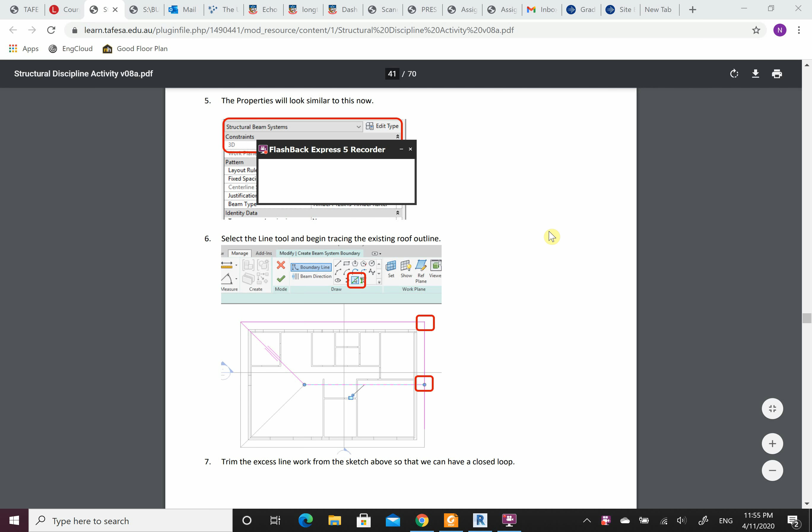Today we're going to go through putting in our rafters and doing our rafter schedules, as well as some callouts and details. I want to bring your attention to the step-by-step instructions again. Please make sure if you're not following along that you are going through these. They are very important and very useful. You will need to do it for your practical 3 as well as your project.

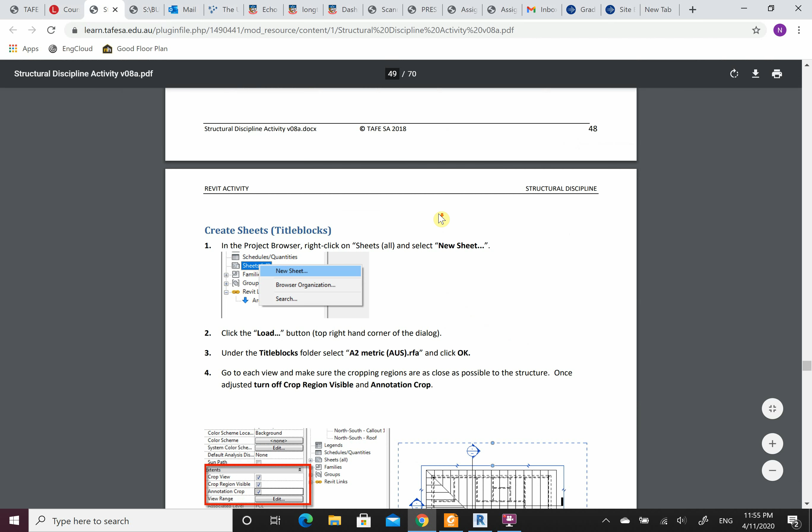The other thing I need you to look at is what is expected for you to submit, which is these two sheets here. So this is what we're going to be getting to. I'm not going to be going through the step-by-step instructions in full, I'll probably skip over a fair bit of this and talk through it as I go. Please make sure you do visit it.

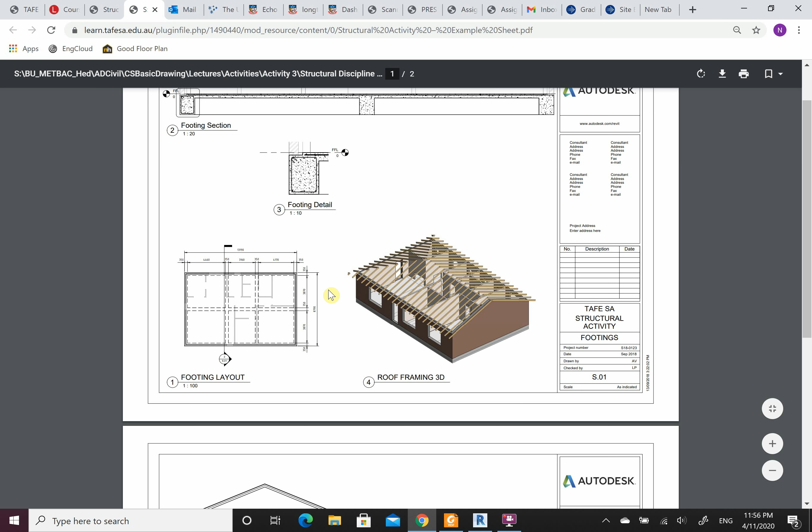These aren't completely perfect. As I mentioned last week, all of the footing cross-sections that you're showing, you have to show reinforcement in all of the footing beams. This solid line here is due to a horizontal beam sitting in front, so that should be hidden as well, same within the footing detail. For our footing layout, from the measurements, these gap to witness lines, these drag lines here, you would hide from the drawing. I showed you on Thursday how to hide them.

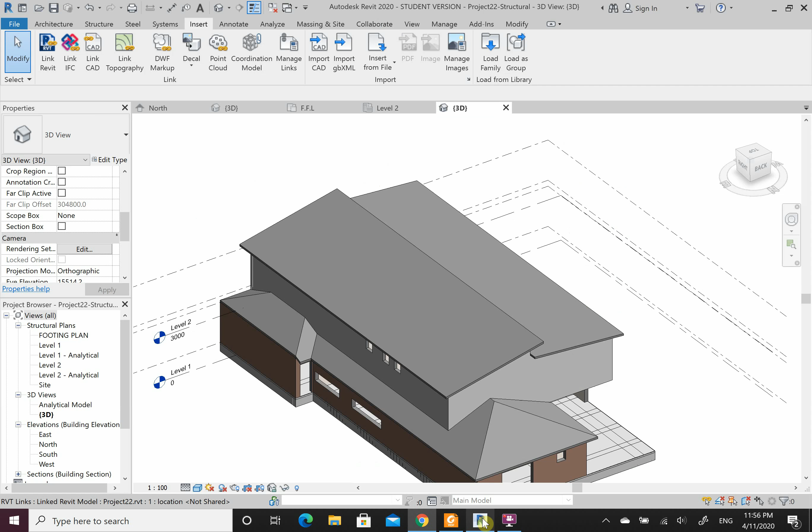So what we're going to be producing is these - this is what we're seeking for our practical 3. I'll be cutting between two drawings, the 2-story as well as a single story. I need to model a single story roof to show you guys and help you for your practical 3. Most of you have a hipped roof like this, whereas for the 2-story we have a skillion up top.

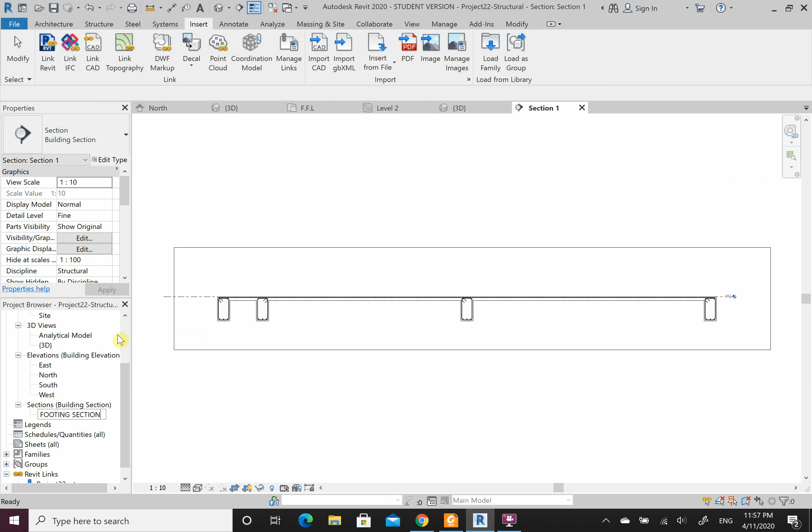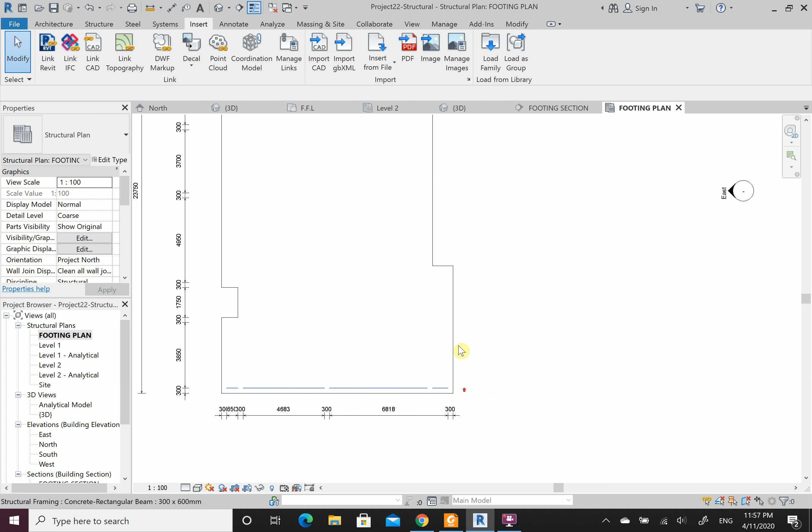Before we go into this, I want to come to my footing section, so I'm just going to rename this one here to footing section. Also want to highlight that usually you wouldn't take something this big - you would find one in your footing plan, and you'd probably take these 3 here. They're much closer together and there's only 3, that's all you need to show: external, internal, external. You don't need to show 100 of them as we come through. So this section probably should have been taken through here, but that's okay.

Now, footing cross section, scale of 1 to 20. Our footing detail, scale of 1 to 10. So how do we create this detail? What we do is we go to View, and we do a thing called a callout.

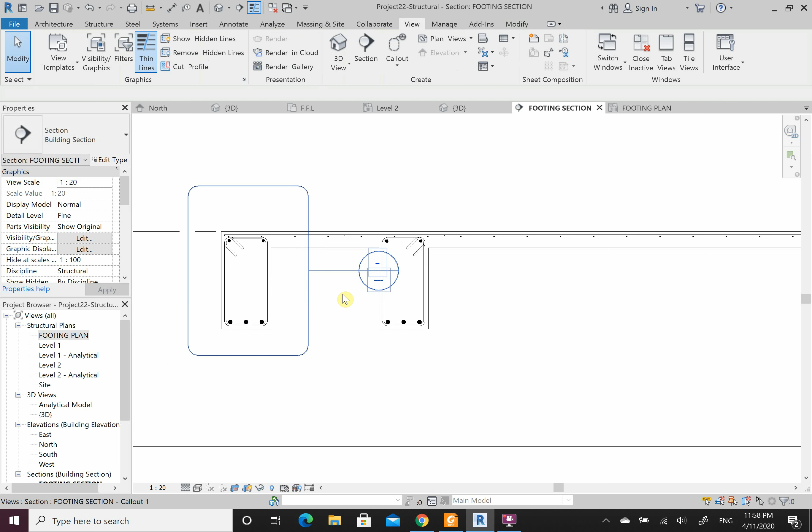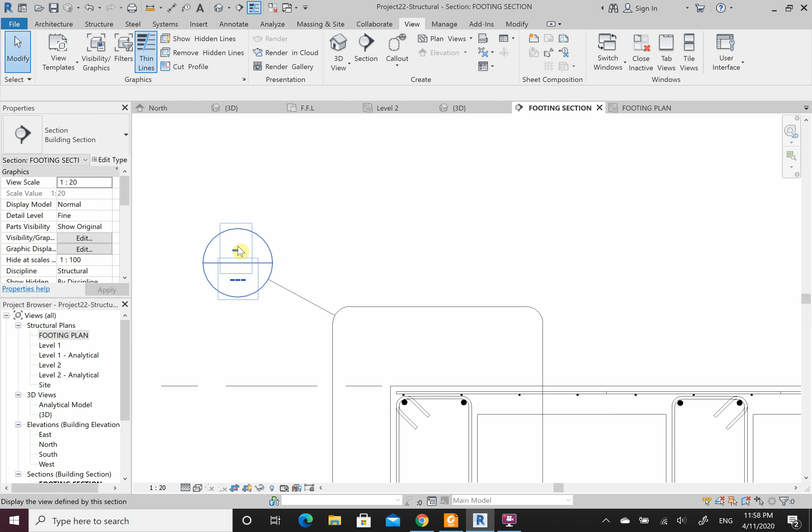Click on the callout, click once, click again, and what's in that bubble is going to create a new view. Spin this around to the outside - I'll come back to what this is here in a minute. But what you'll see is when you put it onto your sheets, this up the top will turn into a number, 1, 2, 3, 4, 5, 6, and that is the drawing number. So if you drag this detail onto the sheet, if it's the 4th drawing on there, this will come up with the number 4.

The bottom here relates to the sheet number that it's on, so if it's on sheet 1, this will come up with S1, if it's sheet 2, it will be S2. Please just be aware of that, but you'll go through more of that in your structural drafting course. So the callout - right click, go to view. This is what it is, so this here, we detail at 1 to 20, 1 to 10.

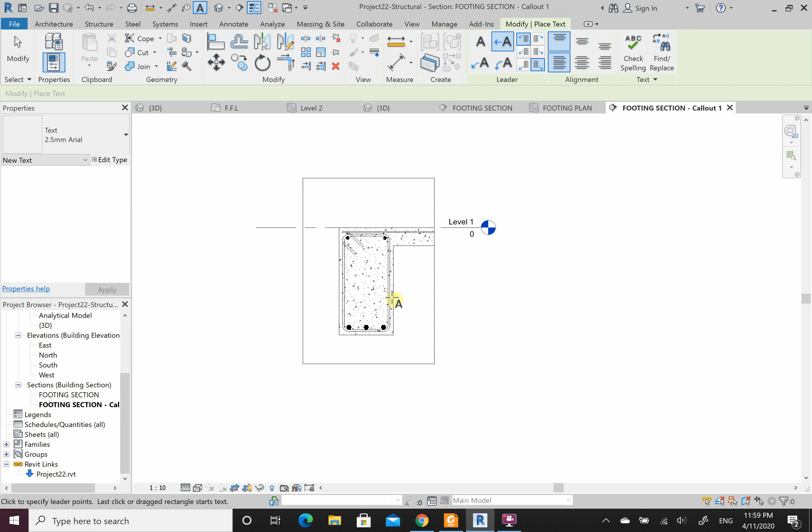And this is where we would annotate. So to annotate on it, we would go Annotate, Text, click with an arrow here, and I might go for the ligatures first, so let's go to here. And these were W10 at 300 centers, W10 ligatures. I can see I can't see it.

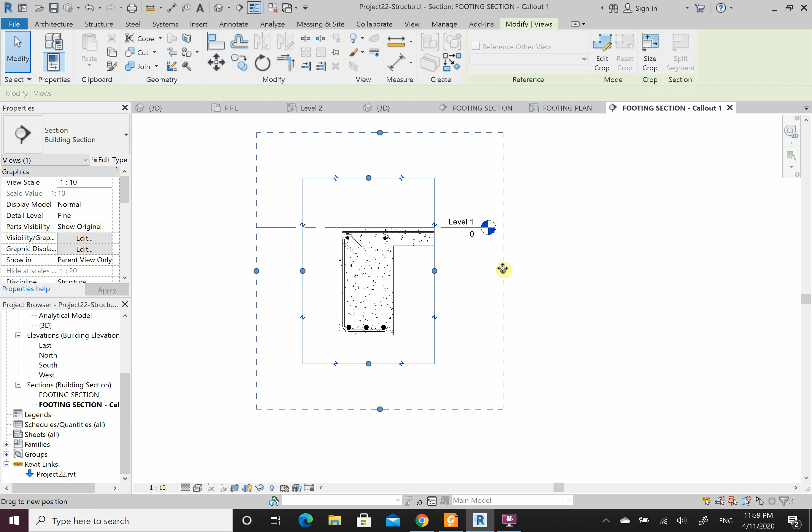Now what is that? Well, if I click on here, remember the solid line is for the model and the dashed line is for the annotations. So if I drag this out, that's all that's happening here, is it's cutting out the annotations. So untick the middle one, making sure the other 2 are ticked. This gets rid of the box, and I might just put in a bit more text while we're here.

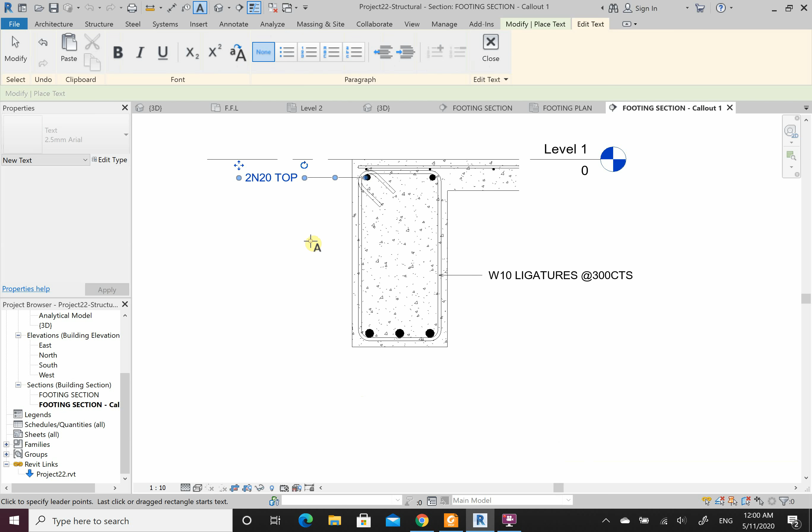You will do a lot more of this in your structural drafting, but we'll just go through it here as well: 2 to 3N28, all in capitals, bottom. And I have 2N20, top.

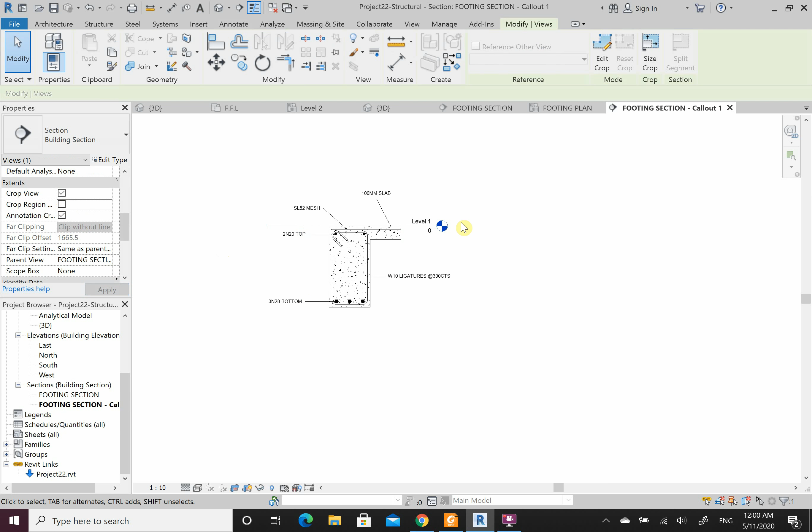From here we could also, if we wanted to, come through SL82 mesh. Might have a slab, whatever details it is that we need. So bring this back on, drag it out so I get that last one. And cool, that is a little detail here.

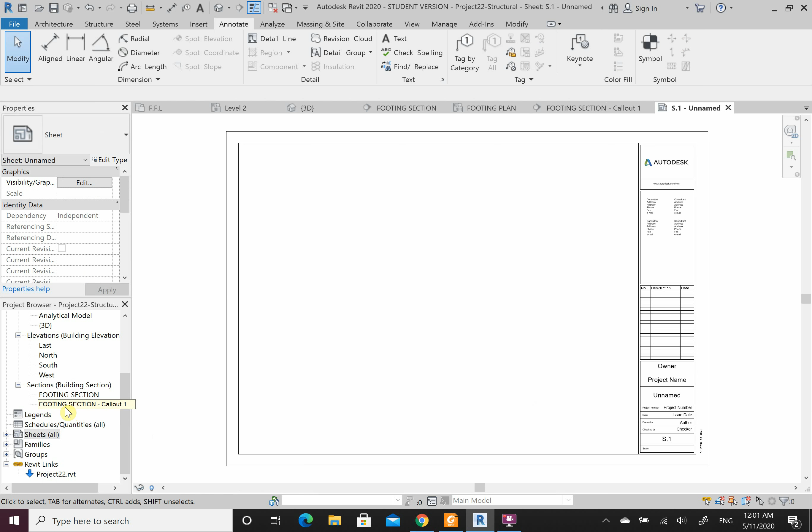We've put some annotations on here. Shortcut is TX on the keyboard, which allows you to write text as well. You'll do a lot more of this in structural drafting, but this will get brought onto your sheet as well. Just to reiterate, when we do sheets, usually it's an A3 sheet. To bring it on, we just click and we drag it across.

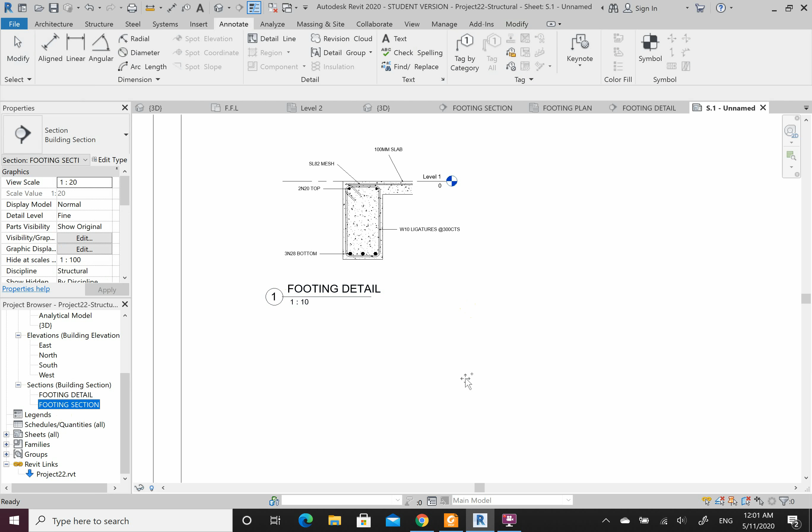So we'll alter this, rename. Here's a footing detail. Alright, so the detail will tuck in nicely, we'll just fix this up. If I bring in the footing section I've drawn before - this one hasn't been tidied up - but what you can see is now I have one S1. So 1 is drawing number 1, S1 is sheet number 1. Alright, so that's where that comes from.

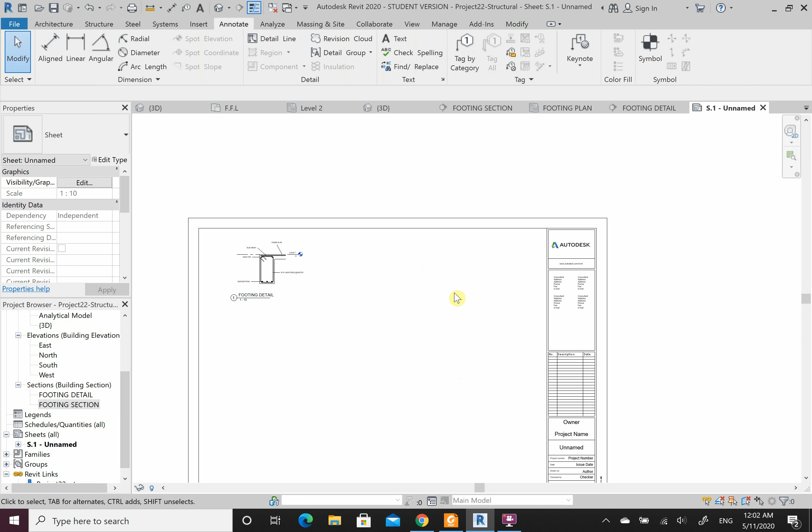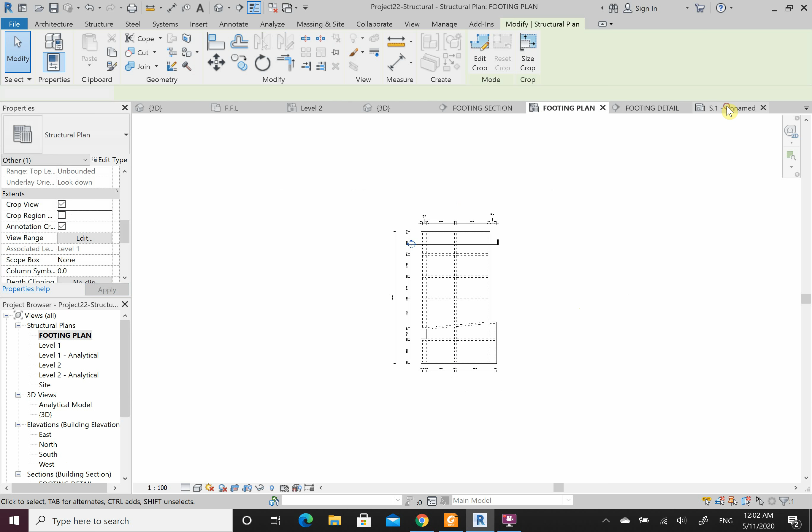So this detail will need to come on. You'll need to do your other section, your roof framing layout and your footing layout. So for the footing plan, making sure to bring it onto the sheet, we tidy it all up. Come back to my sheet and my footing plan will come on somewhere. Alright, let's fix this line up, select it, come across.

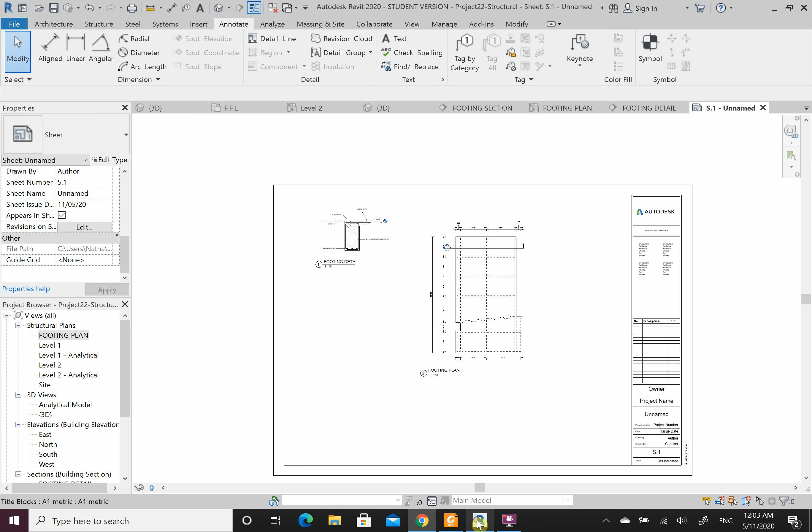What we're going to do is we're going to do one of these, but we're going to put in our rafters first. So you have done your rafters in construction practice. Now we're going to model it onto the computer. So how do we do it?

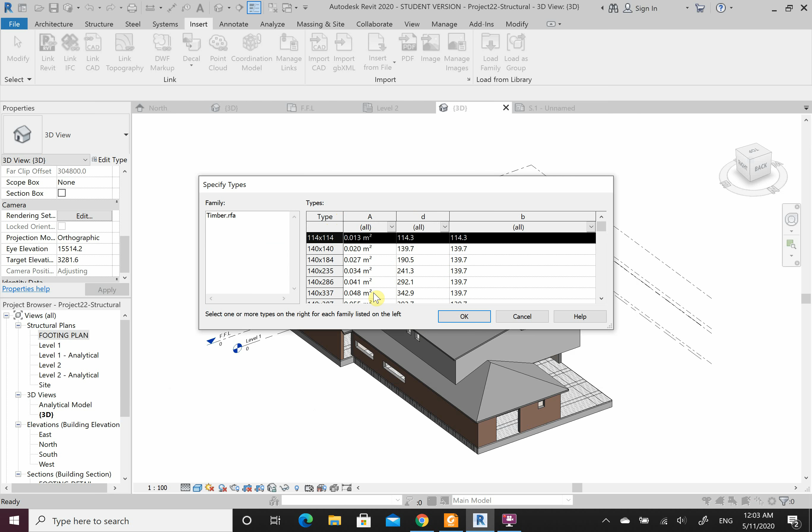Well, our rafters, we have to load in a new family. What we're bringing in is a structural framing, wood, timber. What we want is a 140 by 45 MGP10. So let's grab this one here. Let's go back. Oh sorry, structure beam gets me my timber beam. Edit type, duplicate, 140 by 45 MGP10.

Standard rafter, 140mm deep, 45mm wide. MGP, machine graded pine, 10 is the structural grade. So 10 refers to the stiffness, which is 10,000 MPa or 10 GPa. For steel we've got 200,000. For concrete, between 32,000 to 38,000 MPa, depending on the grade. You'll learn more about that in structural analysis and in your mechanics. So all you need to know is MGP is machine graded pine and 10 is the structural rating.

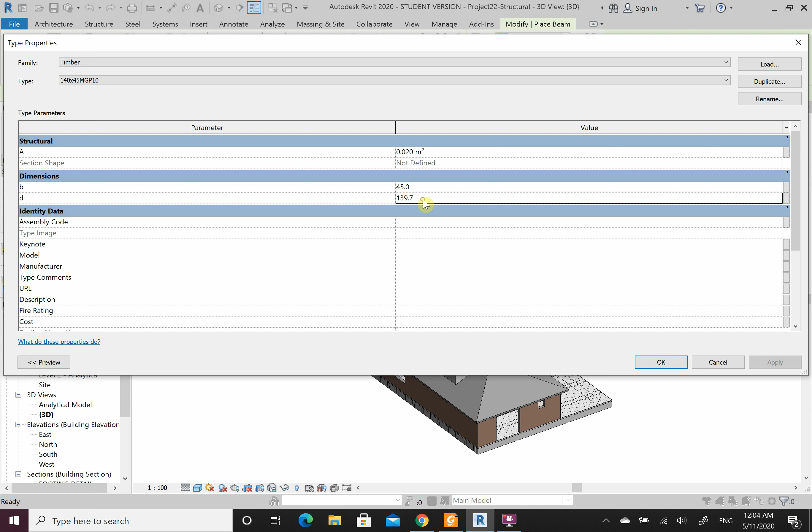Edit it in here, so my width is 45, my depth here is 140. Apply. Now what we're going to do is we're going to go structure, we're going to do a beam system. So what this does is this creates an array, like we did on CAD - it creates an array of just spaced beams the whole way along the roof.

So in the properties I have a few layout rules. My fixed distance, let's change this one here. Well actually, let's start with the layout rule. I've got a few different things here: fixed distance, fixed number, maximum spacing, and clear spacing - for different things you'll use different ones. We never really specify a fixed number. Usually it's a fixed distance or max spacing or a clear spacing. Clear spacing, not so much, so usually it's going to be a fixed distance or a maximum spacing. These are the center distances.

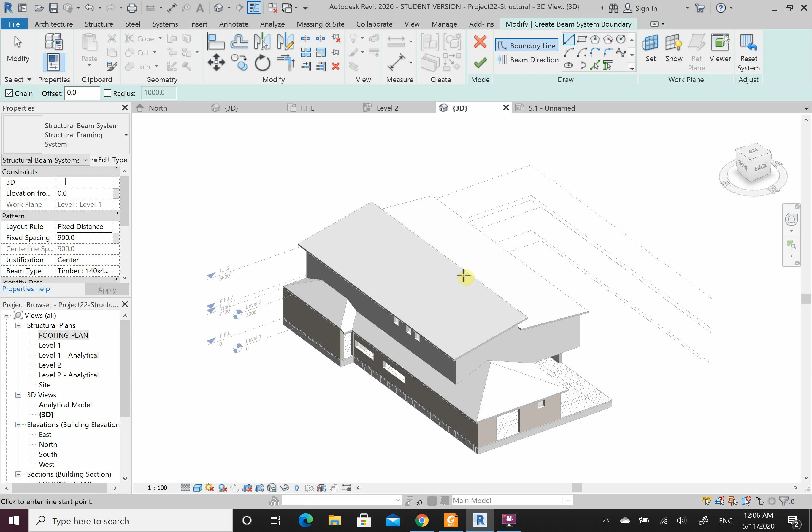So let's take a fixed spacing of 900. Alright, so each rafter will have one, then we'll have a 900 gap, 900 to the centers. And the purpose of rafters is to fix our roof sheets to, so 900 is a good spacing. If we space these out too far, the pressure of the wind hitting the roof sheets, if they're not fixed at close enough intervals, the wind can rip the roof sheets off. You'll learn more about that in your structural analysis. But for now, let's take 900 for our rafters, and our trusses might go to 1200.

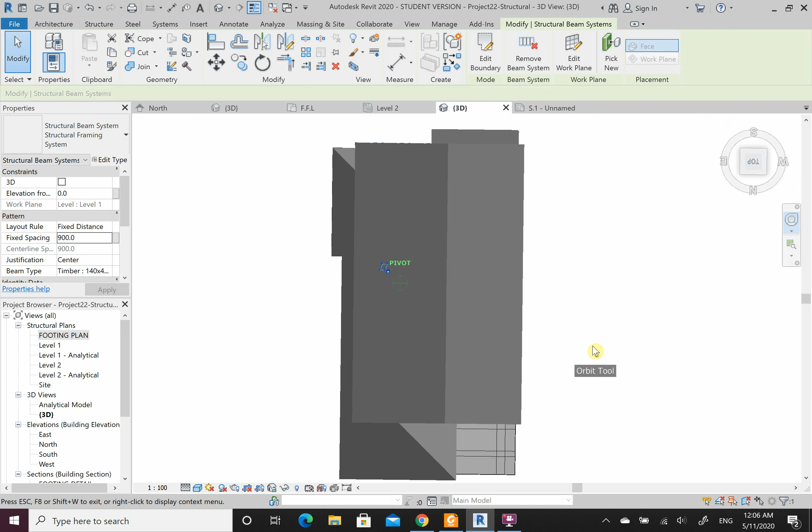So let's come to the top. Let's pick our lines, so let's do this part of the roof first - here, here, here, and here. And let's click the green tick. Now what's it done? Not a whole lot. So what you can see is I've actually modeled all of my timber beams underneath my house, which is not correct. Our rafters go on the roof, not on the ground. So let's undo that and let's delete it.

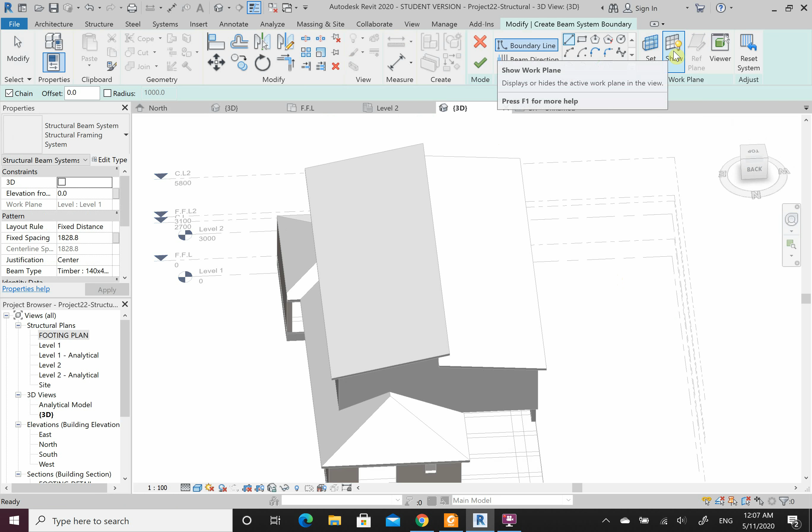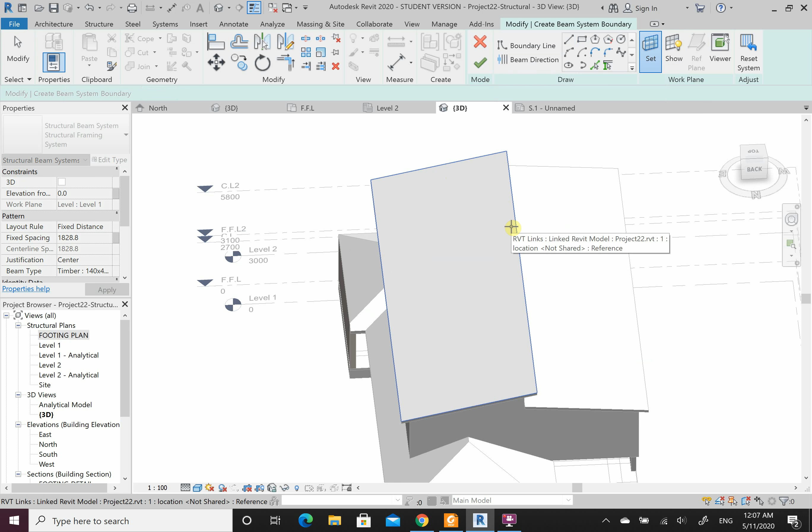Got to work out a way to bring them up. So what we do, and you're going to be using this a lot in structural drawings, is we go beam system and we set a work plane. So if I look at my current work plane, it's at the floor level. So if I set a plane - for us, we're not going to be picking through here, we're going to pick a plane. We're not going to name it - we use the names if we've got our grid systems, but we don't. So we're going to pick a plane and go OK. Highlight it in blue, it's the top of the roof. That's what I want - I want it to follow the work plane or the slope of this roof. So click on the roof, and now let's try pick our lines.

So if I can't grab it, tab will filter me through what's under it. Or you can just zoom right in.

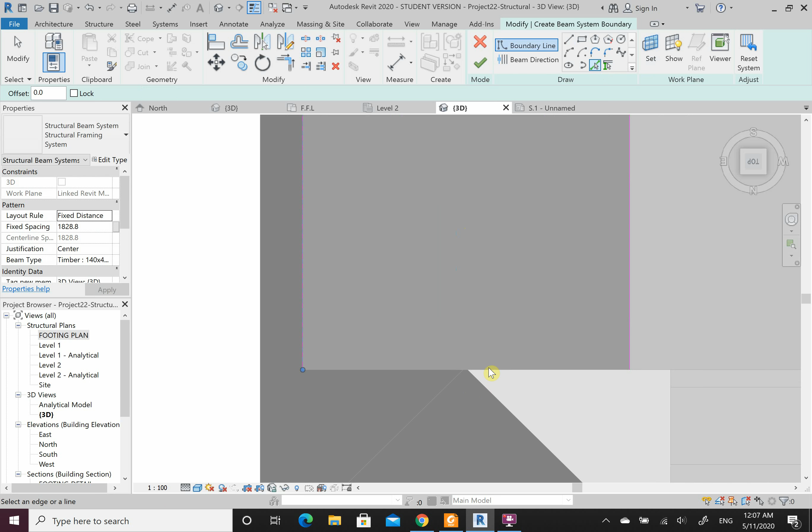900, cool. And my beam type is still my timber. I can flick through everything else here, but this is what I want, is this timber. Green tick. Alright, now that looks a bit better.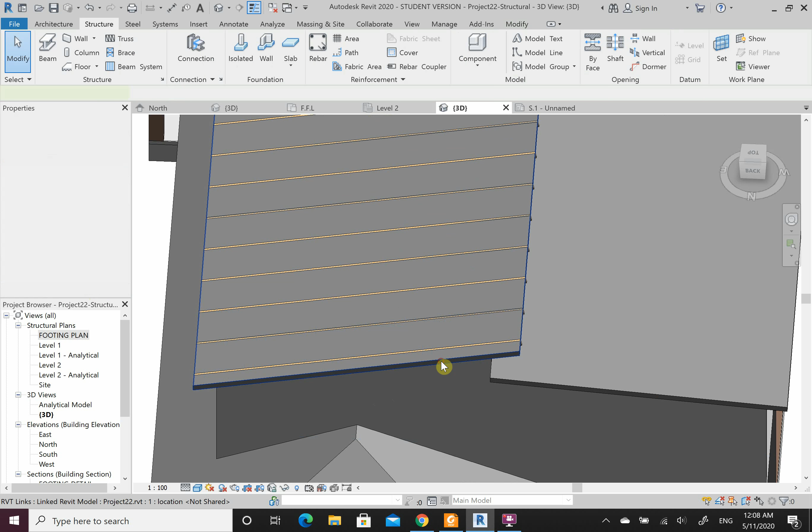So if I hide this one roof, circle through tab, hide element, this is what I've done, is I've put in my timber through here. Cool.

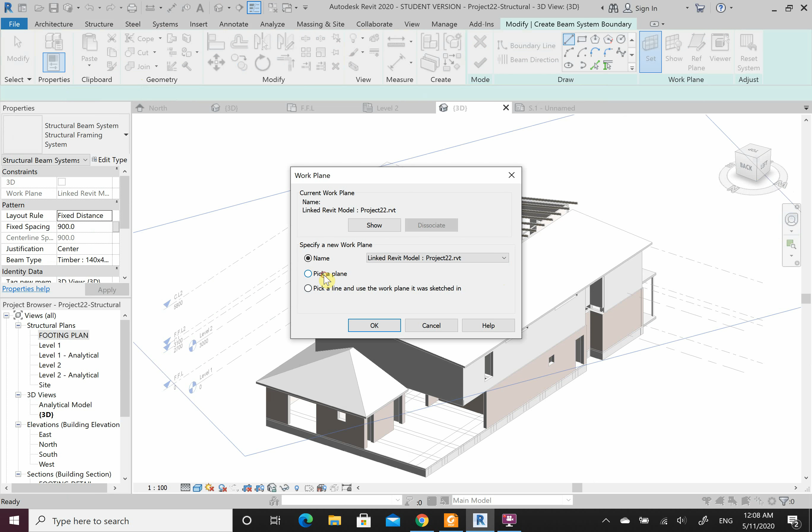Now I need this one here as well. So let's go, same thing, beam system, set plane. You have to do this every time. You have to set your work plane when you're changing roof or if you're changing pitch or slope. Alright.

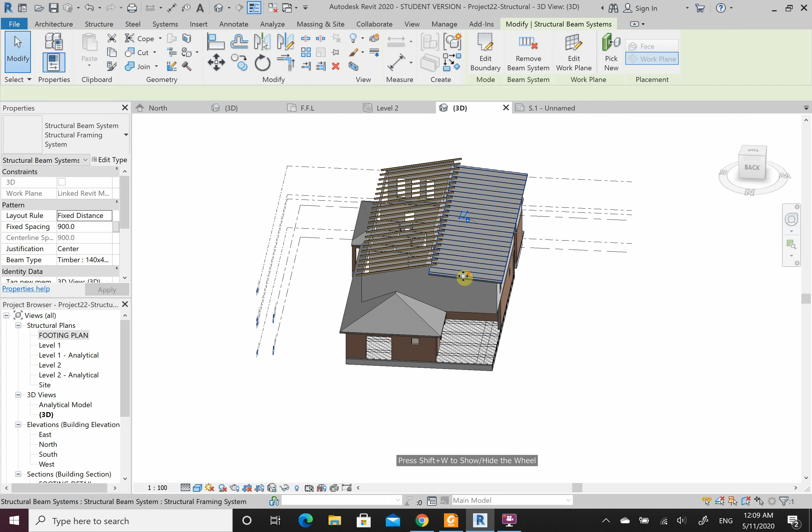Green tick. There we go. I have these rafters here. Tab, tab, tab, tab, tab. There's the roof. Hide in view elements. So now I have these sitting up here, which is much better. Alright, and now I have to move on to the next one.

Before I move to the single story house, a few more things here. The reason for me doing the single story house is, like I said before, that's what a lot of you have. Most of you don't have the skillion roofs here, so we've got a bit more of a complicated roof to do.

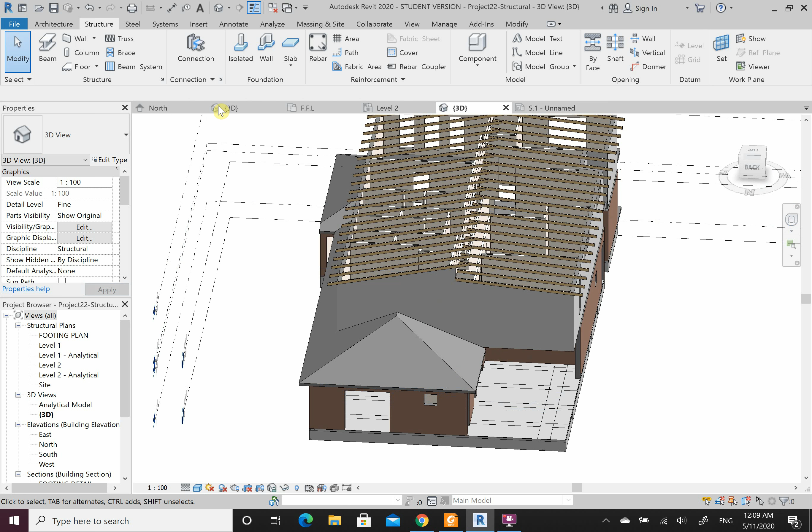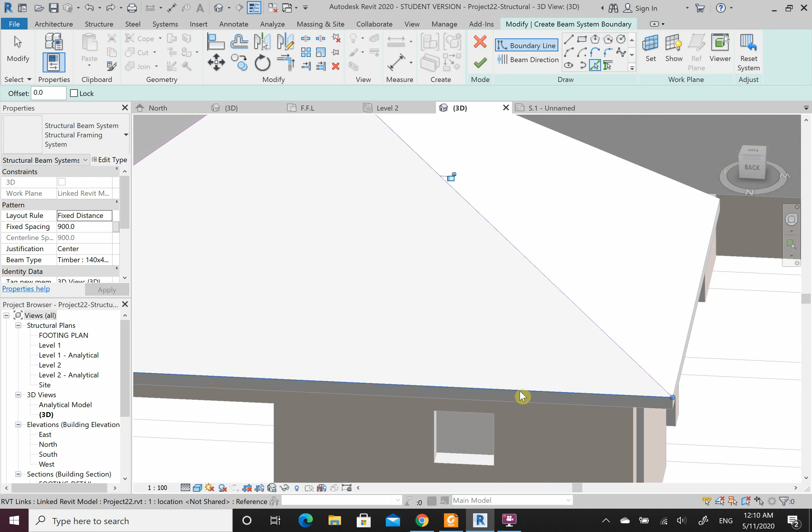So let's come through, beam system, set a plane, pick a plane, pick this one here. Let's come through, pick the lines, so not that one, this line, can't grab it, so zoom right in, this one, and this one. And now let's click the tick and see what happens.

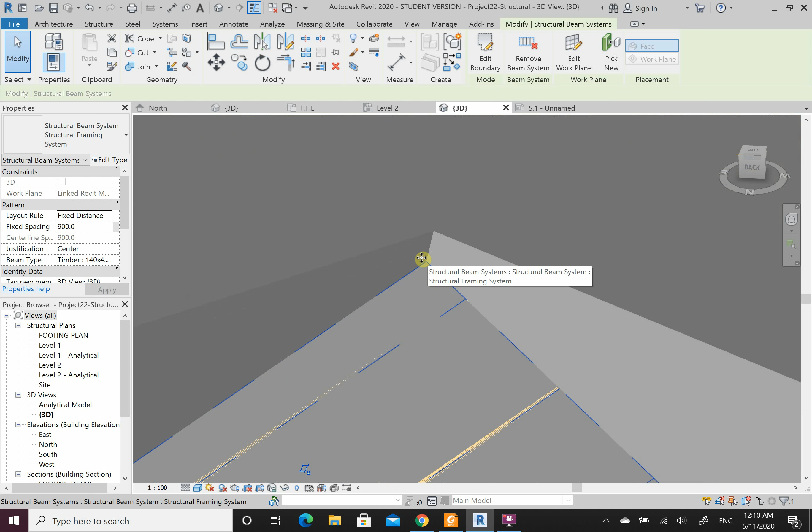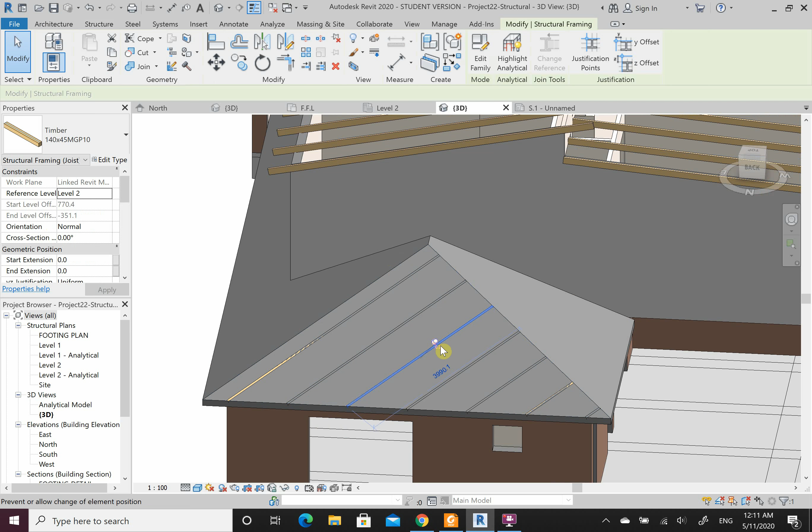So how are we going to change that? Well, let's grab the beam system. Alright, so there's two things I can do. I can either grab the beam system or I can grab the individual beam. If I grab the beam, they're all pinned. Alright, to show you, all of these are pinned. To unpin them, UP on the keyboard will unpin them all.

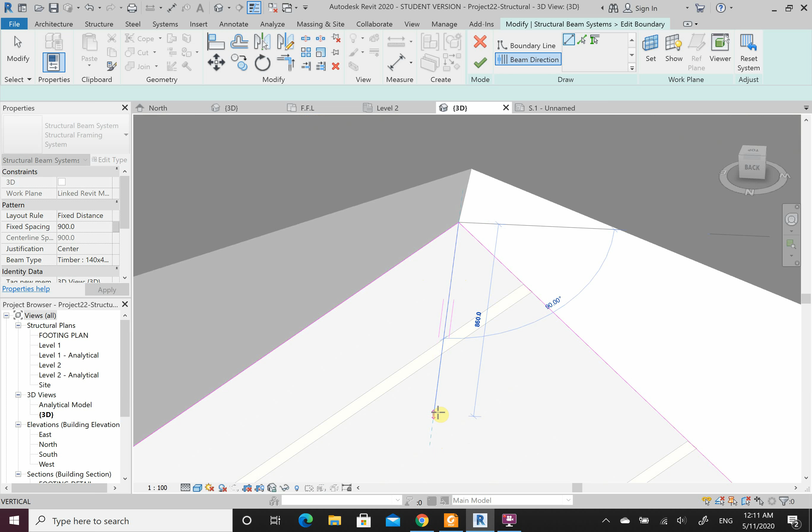But for now, we need to grab this beam system. We need to edit the boundary. For skillion roofs, this is okay. When we've got hipped roofs like this, every time we draw one, we need to specify the beam direction with a line. We grab it from the point. We come down at 90 degrees. This can be whatever measurement, it doesn't matter if it's 30 millimeters or 3 meters. Alright, and then we click the green tick. And this is what we get.

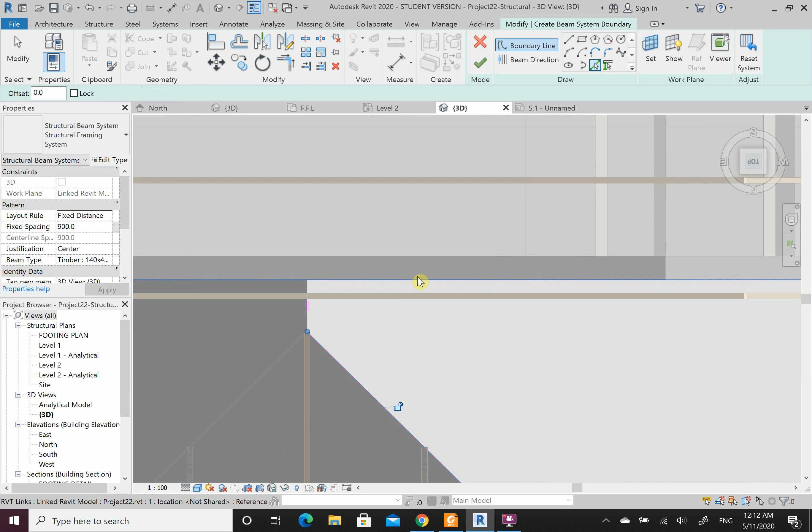So, same thing on this side. Beam system, set plane, pick a plane, okay. To here. Now let's pick these lines. Trim them all up. Specify the beam direction, 90 degrees from here. Click the green tick. Now, what's going on?

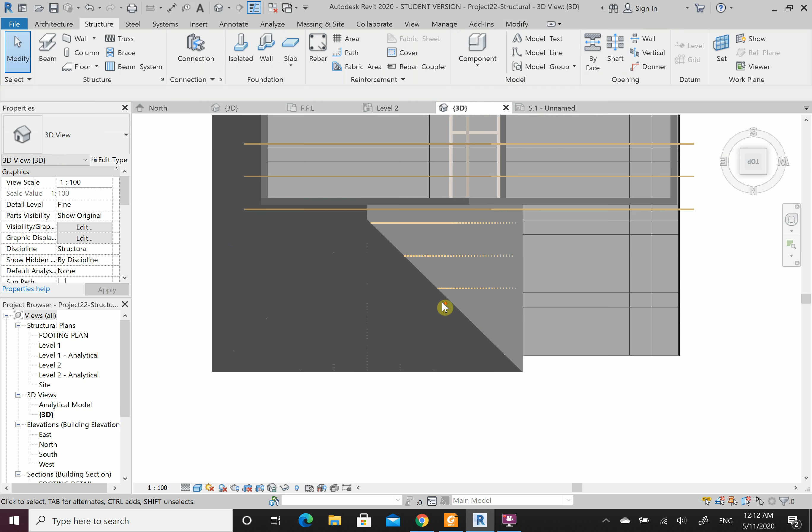These aren't quite lining up, and they have to, they must. Which means there's a mistake. So these are close, but not close enough. So if I pick on these, what's happening? Well, I'm justifying it from the center. Now that might be okay, it might not be. I might have to play around with this a little bit.

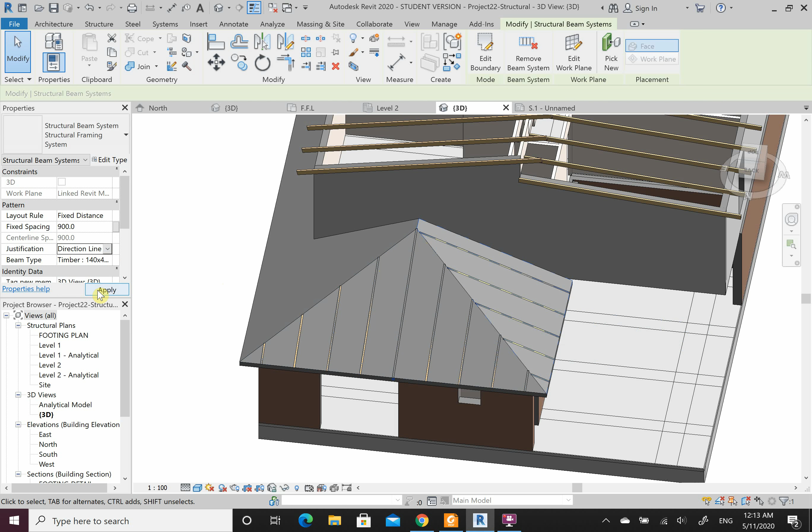Got a few different things I can do, but what I know is if I'm setting the direction line from the same point, this is from the direction line, and this here is from the direction line, they will always line up. Okay, so that's what's happening here. So now you can see these rafters are lining up much better. So if I hide this roof, what you can see is these are all marrying up perfectly, and so would the other side.

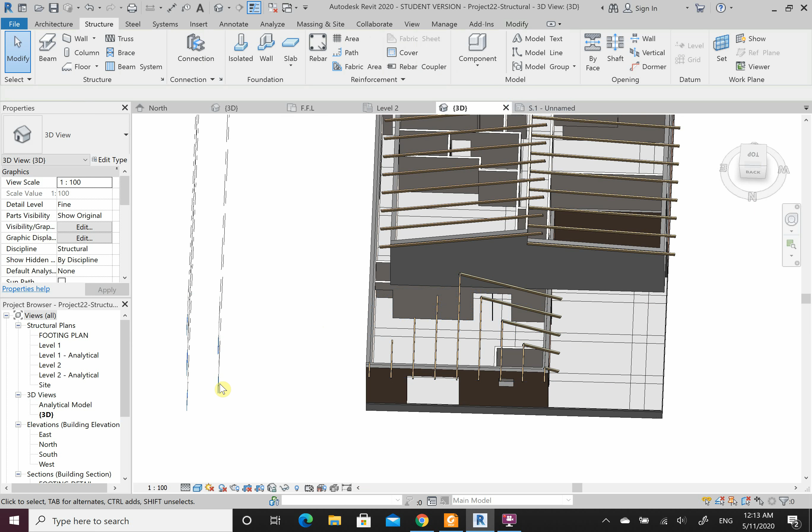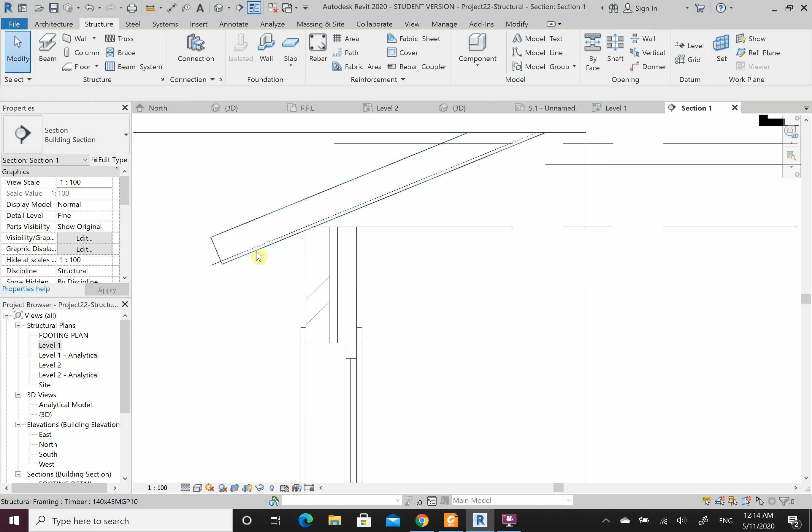Couple of things. Let's come to our level 1. Let's take a section. Let's go through this back wall. Right click, go to view. Now what's happening? What I can see is my rafter and my roof. So my rafters are sitting on the brick.

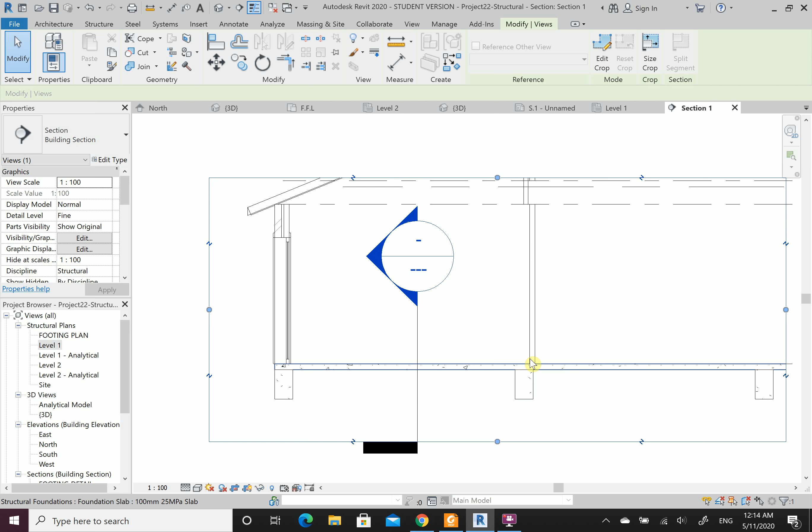Now I know that's not true. My rafters need to sit here on my studs. The reason for that is the brick is very brittle. All of the load gets transferred to the external studs. So usually we try not to have any internal load bearing walls. Alright, so usually we don't have any force running to these walls other than its self weight. If we attach a roof or an upper story to it, we have to either have a footing within 500 millimeters of either side of it, or what we're going to have to do is put a thickening here for the slab and then reinforce it accordingly. But you'll learn that in Geo.

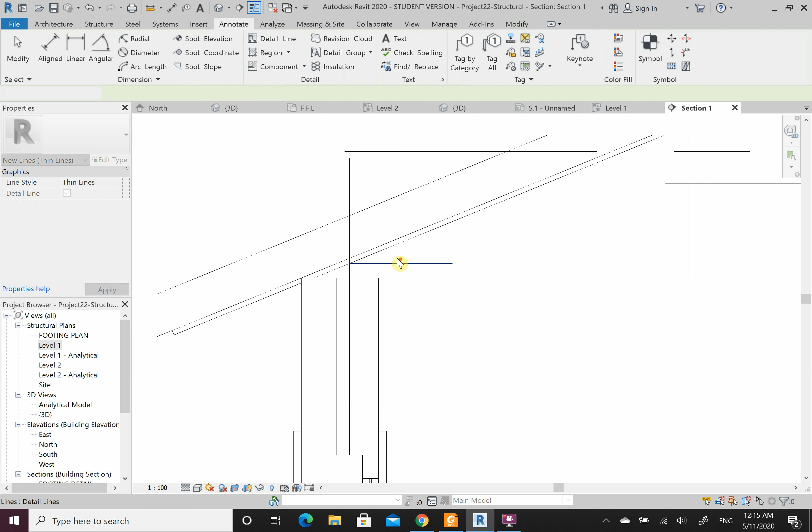So for now, what I need to do is work out how I'm going to drop this brick down, but I've also got to drop the rafters down. Let's go to annotate, Detail Line, come straight up, escape, and where they intersect, come across. Now let's turn off the roof while we're here. Let's go VV and hide the roof.

So we're just looking at our rafters now. What I want to do is move all of my rafters, say, from this point to this point. But I can't move it, it's not letting me. So let's try again. What if I select them all, move, unconstrain them and disjoin them. Now I can grab some stuff, but not a whole lot.

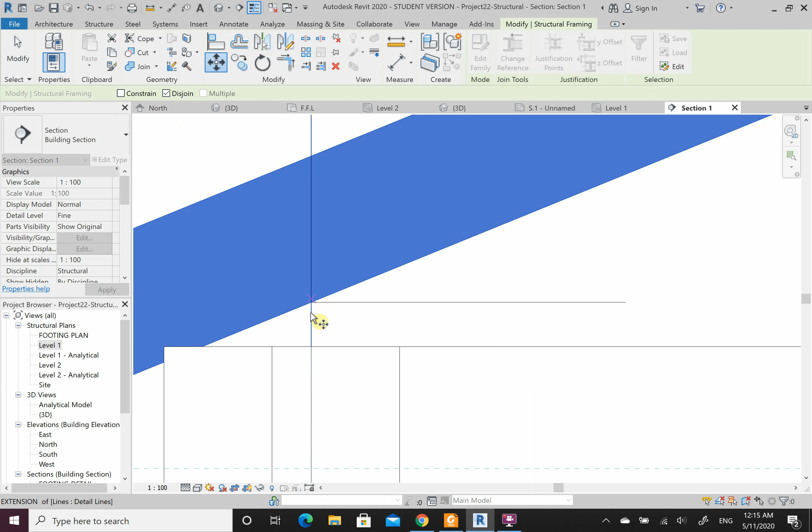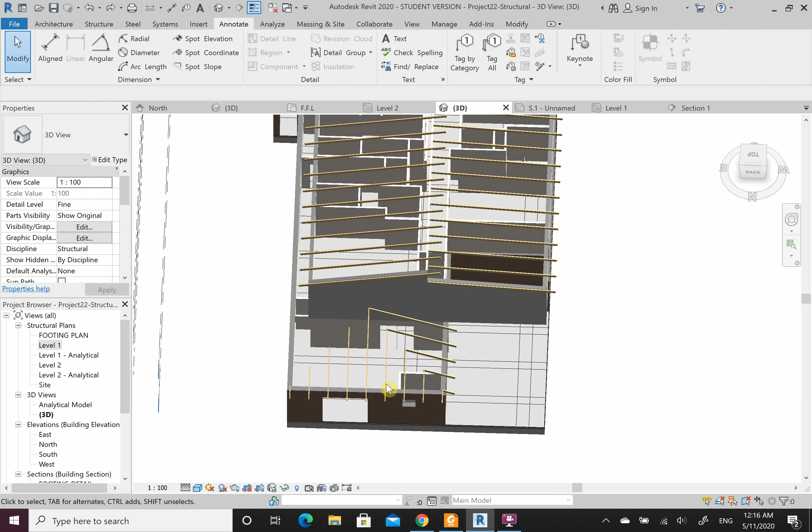The other thing I need to note is if I move from here to here, nothing really moves. Coming to my 3D, if I go Control Z, they did shift, but not in the direction I wanted. More importantly, these rafters here, by selecting them all, are the same, so all of these will move as well. I just want the bottom floor to move, and you'll see this more so when we do this house here.

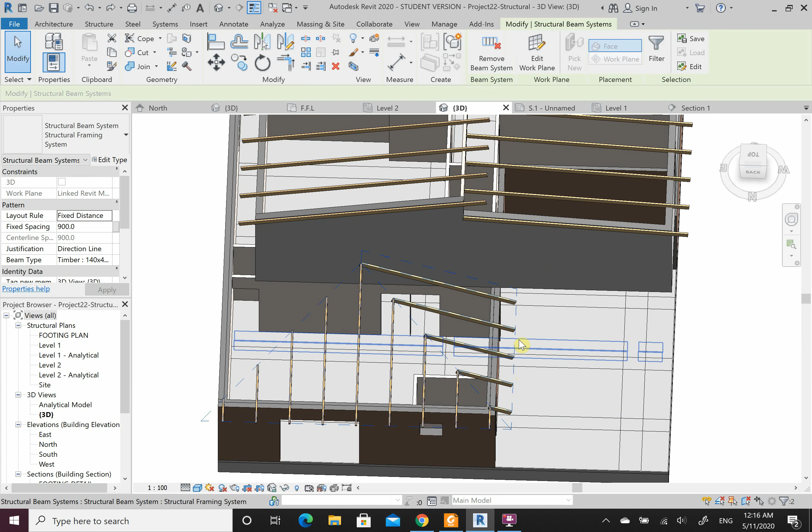Sorry, I know it's jumping around, but for your two-story, your entire ground floor, you'll have to select the beam systems. Click one, Control, click the other, come back to your section, and now move from this point to this point. Delete, delete. So you have to note that you're grabbing the beam systems.

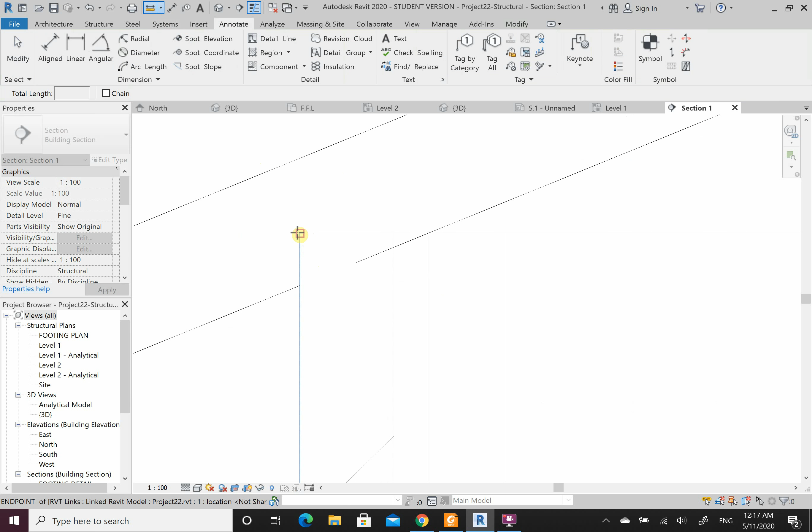The other thing is, well, this is now cutting the brick, which shouldn't occur. So what we do is measure from here to here, 62.1. Now drop that brick course down, right click, open and unload. Yes, that's what I want to do.

Sorry, I don't know if you can hear this other fan kicking in. That's just my other laptop about to kill itself. Awesome, just turned it off. Alright, sorry, where was I?

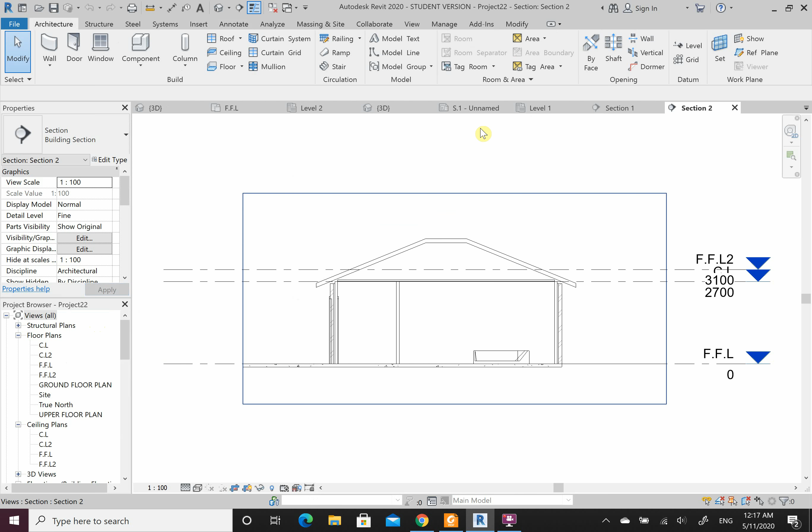The brick, that's what I'm doing. Oh, I've already dropped it on this one. So the brick course should be sitting here on yours.

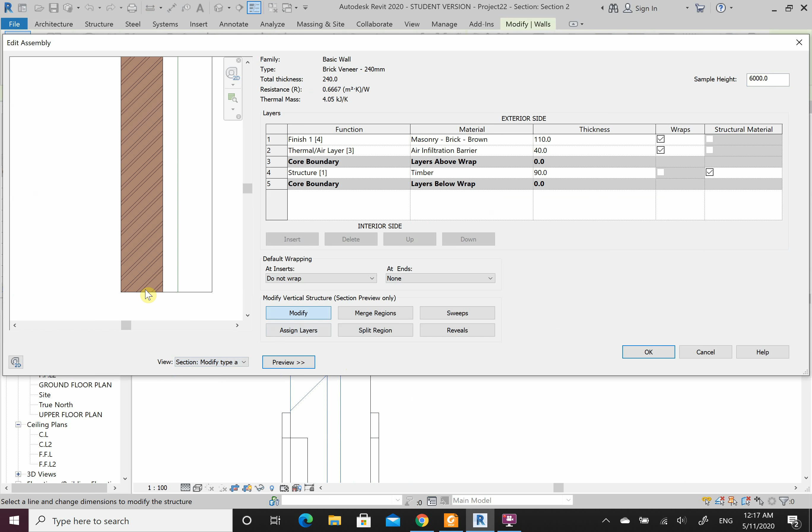So what you need to do: select the brick, edit type, edit preview, change your preview, and modify. Just like we did to unlock the Hebel down the bottom, this time you're doing it to the brick course up the top. You'll select the top line here and unlock it. Select the thermal gap and unlock it, and go OK. Then you'll get a wall sitting like this.

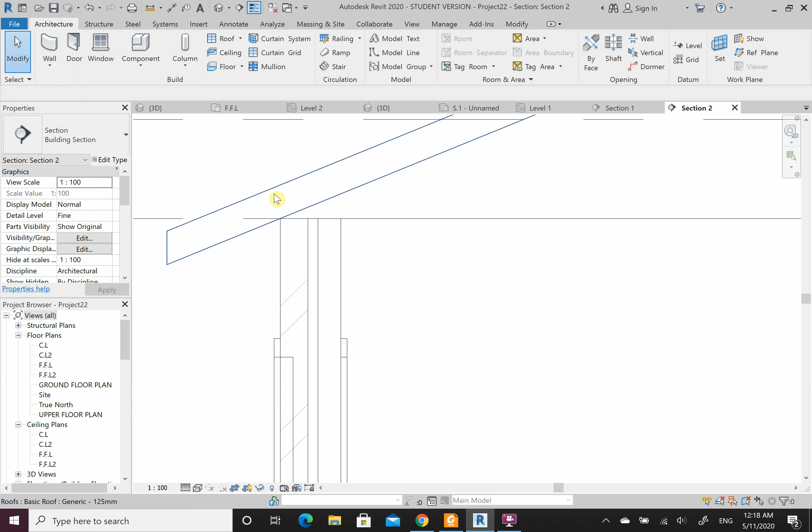Alright, don't worry about the ceiling, that's in my drawing. Now the brick has to come down by 62.1 millimeters. So annotate, detail line from here, 62.1, and let's come straight across. Now we can just drag until it snaps, delete our detail line, and there's this one.

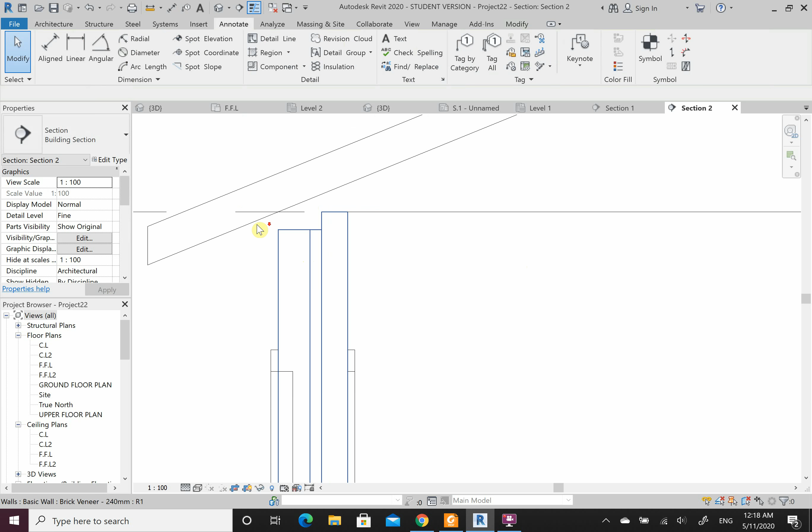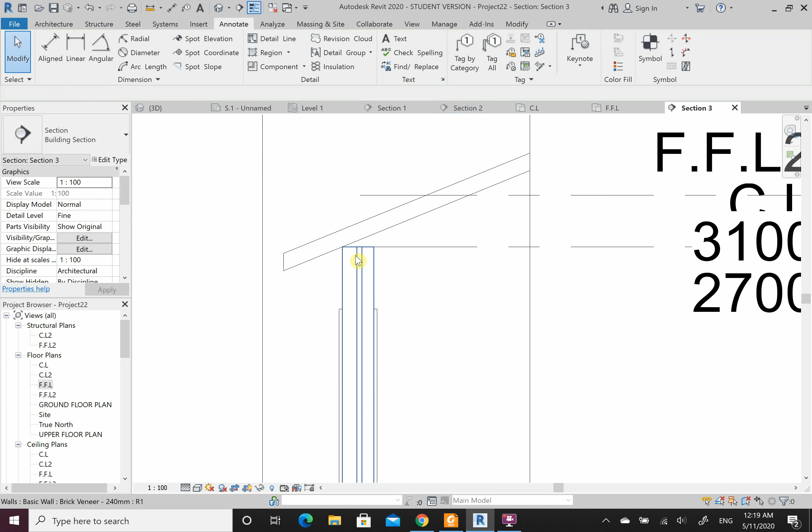The other way to do it, I'll do it for another wall as well. Finished floor level. So for this wall here, right click, go to view, detail level of fine, zoom right in, detail line, straight down, 62.1, straight across, delete and delete. So we can do it either before or after.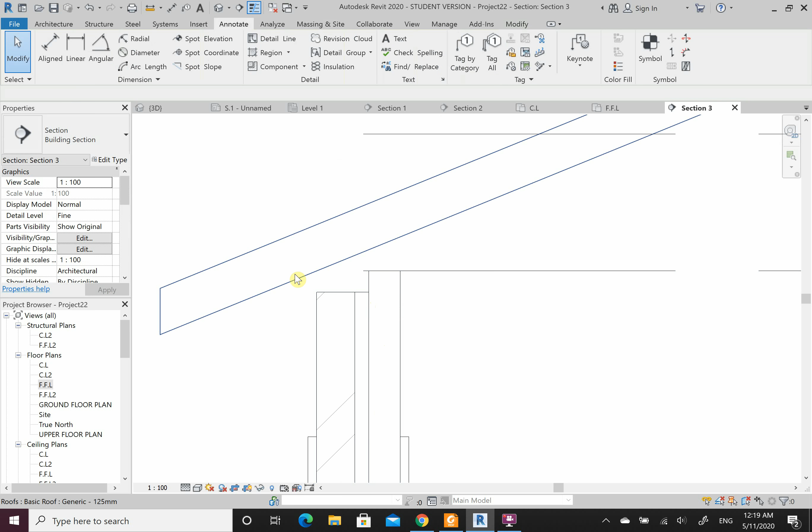So in our architectural, we could have moved the entire roof down. That would have solved this issue, but doing it after works as well. Also, the detailed lines that you draw, delete them out. Just so you're aware, they only show in the section that you've drawn them in. They will not appear in other places in the drawing.

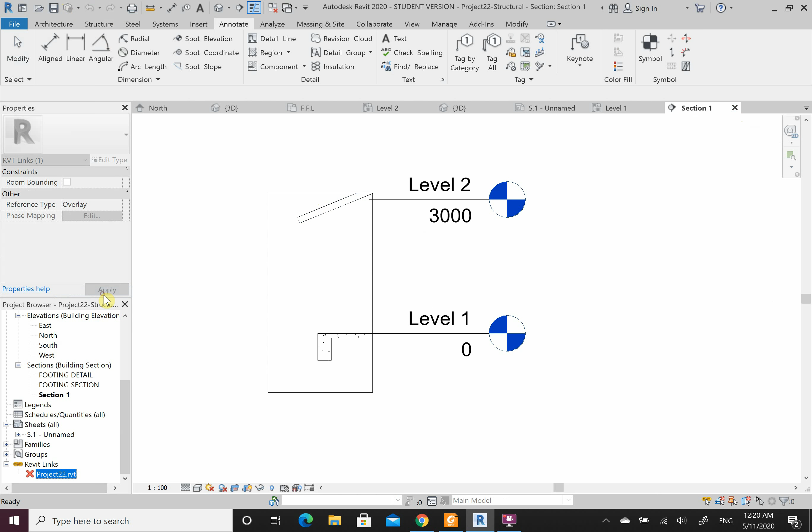So once you've done that, save it. You have to save it. Close out of it. Now we're back into our structural. Reload it. And this is what we can see: it connects to the stud and misses the brickwork.

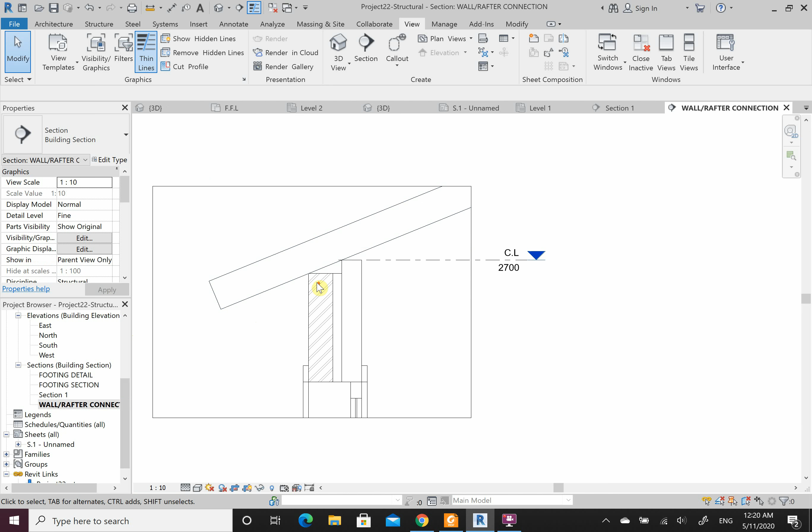Cool. From here, we can also, if you would like, take a call out around this point. And what this call out is - if I rename it, this is our wall rafter connection. This one here, you'd make it a 1 to 10. Then from here you can detail your expanded foam, your seals, and everything else, your cornicing, everything else you've put in here.

So that's how we can do this. You'll learn more about that in structural drafting and throughout other studies. I think you've done it in your construction practice as well, but I'll show you a detailed drawing tomorrow. Alright, so that's how we put in our rafters. How long is this going for?

Okay, plenty of time. So what we need to do is make a schedule. Right click, new schedule. So what schedules are is this is our materials takeoff for our project. We've got many things that we can find in here. We're going to be doing just our structural framing, which is our rafters.

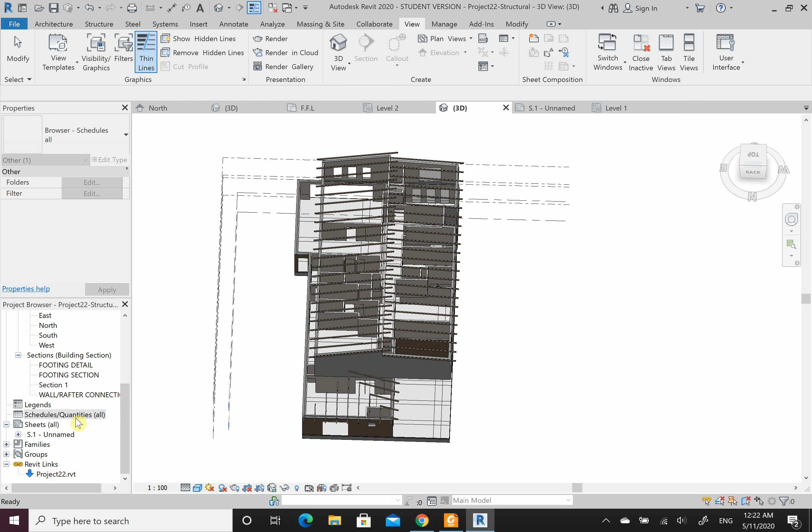We're going to do a cutting list, but we will also do it for our cut and fill in the next couple of weeks coming up. So what we need to do is come to our structural framing. That's the schedule that we're making, and we go OK. Oh sorry, actually, let's cancel that. Let's come back, right click, new schedule, go away. Structural framing - you can change the name if you want to. This can be your rafter cut list or rafter schedule.

OK, and now we're bringing in some parameters that we're going to use. So what do I want? Well, I can bring in the cost, although I don't really know the cost off the top of my head. I'd have to go through Bunnings or a timber manufacturer to work that out. But I know I want the count, so count them up and tell me how many I've got.

I want to know the lengths of my rafters. So if I'm going to work out the cost, I'm not going to order this bit, this bit, this bit, all individually. What I'll get is, if I've got all of these, maybe 20 lengths of 8 meters or 6 meters, and then on site I'll get them to cut the lengths that they need.

The other thing we're going to bring in is a mark. This will make sense in a minute as to why we're bringing that in. But these are what we need.

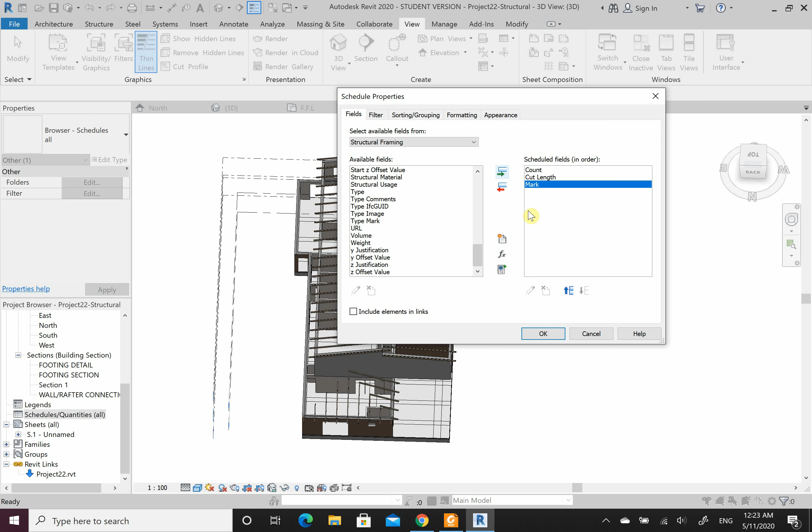The other things we can bring in, well, there's a lot that we can do. We can create new parameters, we can actually bring in Excel, we can create formulas. We can create all kinds of things here in Revit to get an entire quantity takeoff list or materials takeoff for our project, as well as the costings. You'll learn more about this in structural drafting, but just be aware that it is there.

Filter, we will come back to this, but what we do is we filter out what we want. Sorting and grouping, this will make sense when we're looking at the actual schedule, but it's just how we sort them all together. So if I sort by cut length, ascending, descending, let's go ascending, click on grand totals, tell me how many I've got, and let's leave this on for now.

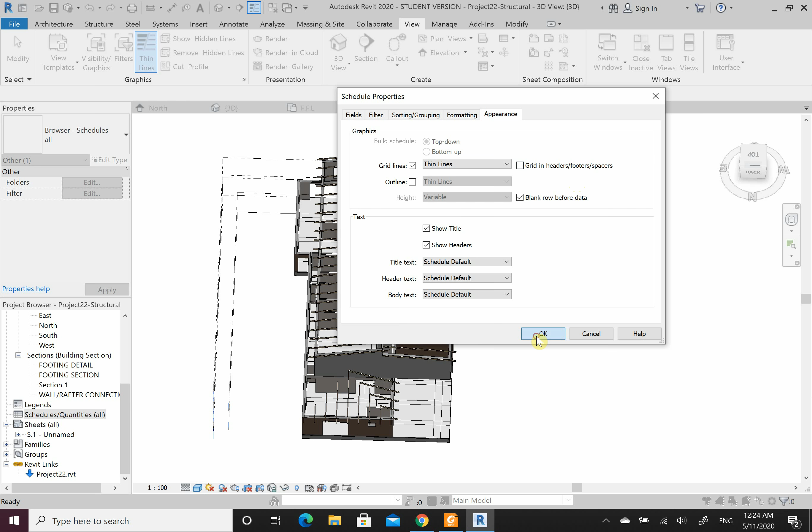Formatting and appearance is just altering the looks of our schedule. So let's go OK, and this is what I get. So I get a few lengths of these, a few lengths of them.

These are all in millimeters. Please do not forget millimeters. So 111, 111 - that's how many of this I've got. And this is what the itemize every instance option is doing.

If I want to undo that, I've got the properties here. So I go to sorting and grouping, but uncheck itemize every instance. Go OK, and now it counts them or adds them all together.

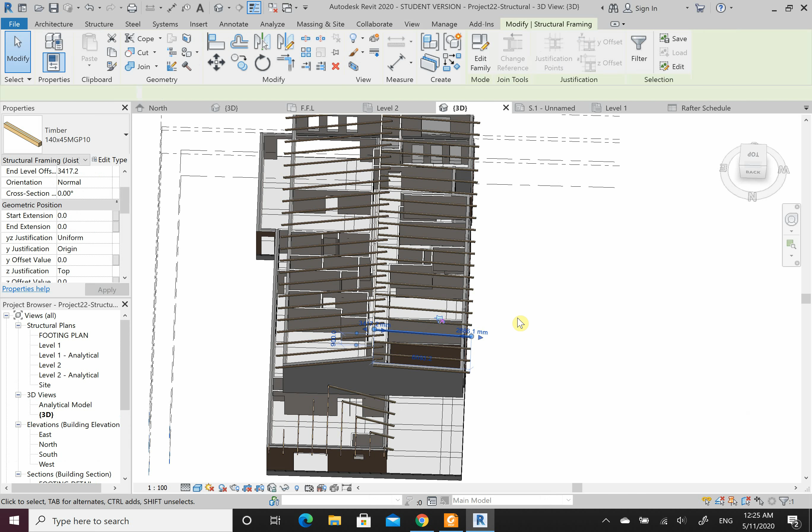So going back to my 3D view, select one rafter, SA to select them all. In the properties, let's come down to our mark and type this in: 140 by 45, machine grade pine, 10,000 MPa.

Apply, OK, let's now have a look at our rafter schedule. So these are my rafters. The rest of them are my concrete.

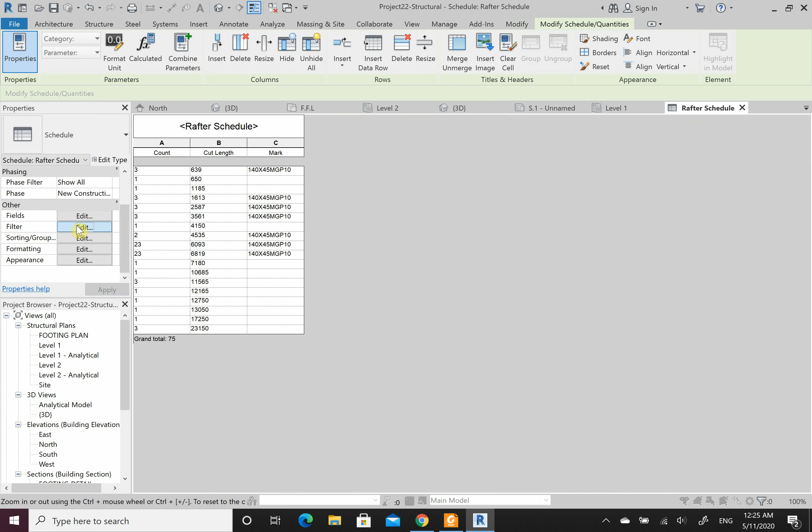So this is where our filter comes into play. Filter out the mark - this is the mark that I want - and go OK. So this is what I get. This is my rafter schedule for this project.

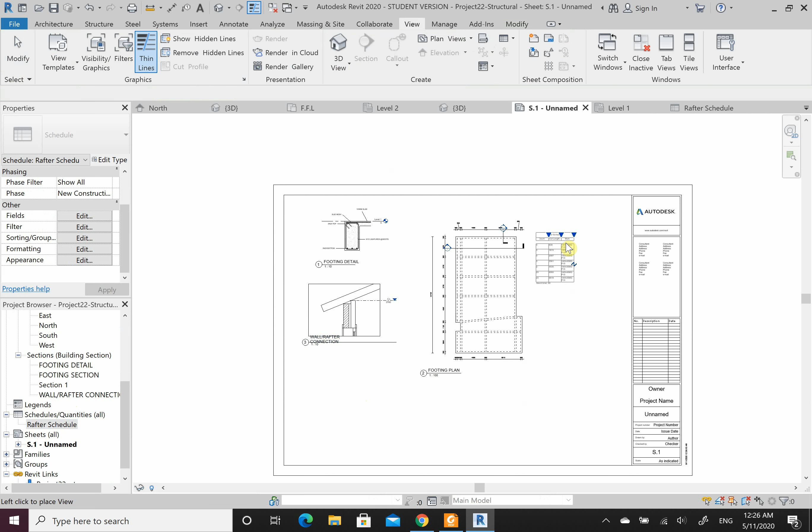So how do we put it onto a sheet? Same thing, let's just bring this across for now. Schedules, drag it in, we chuck it somewhere, zoom into it, make it a bit wider. So it just sits in there somewhere.

We'll have ones for rafters, we'll have ones for columns, we'll have ones for concrete. What you'll see is down the track, when we do our concrete, we'll get the cubic meters or the volume of concrete that we have. We'll then get the amount of ligatures, the amount of N12s or the lengths of the N12s, the lengths of the N28s. And in the ligatures, we'll get the schedules to tell us how much the radius of the bend is and all of that kind of stuff.

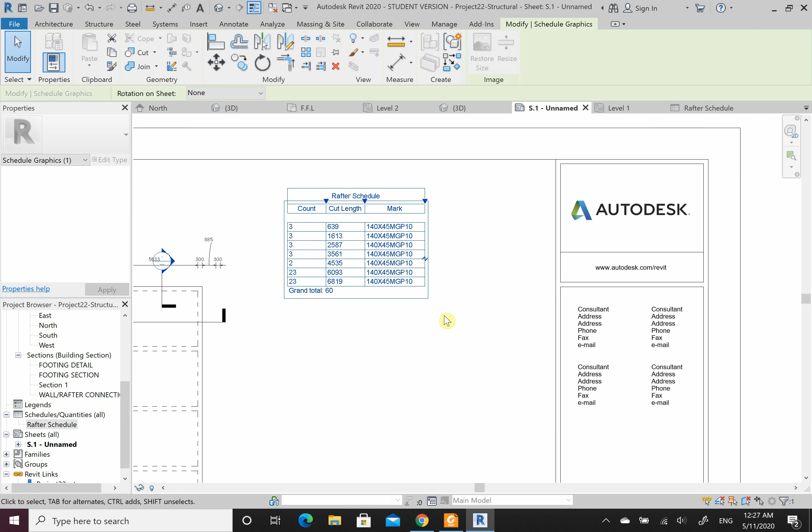But you'll do that in structural drafting. The other thing to know is if we have a crazy long list, which you probably will get, I click this break line here and it splits into two. To get it back, just click and drag it over the other.

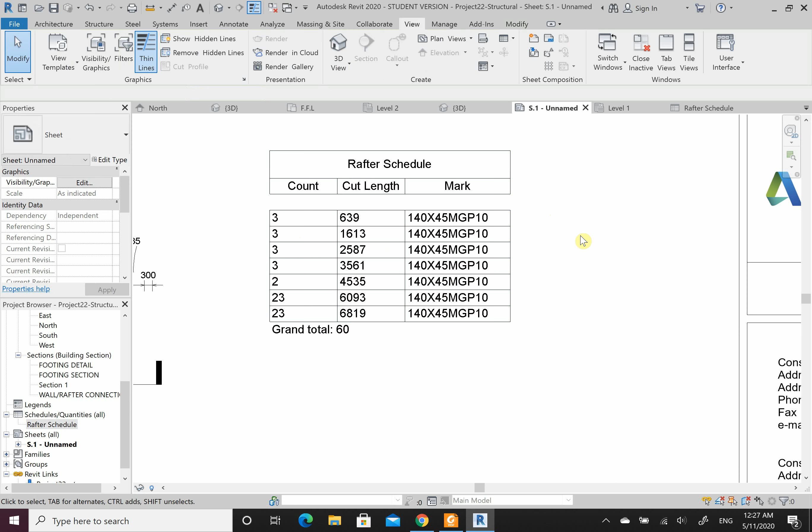And then the grand total of how many rafters I have in my model. Alright, so that's how we do the first bit.

Now what I want to do is come through and show you how to do your single story. But what I'm going to do is just pause the recording and do this in another one.